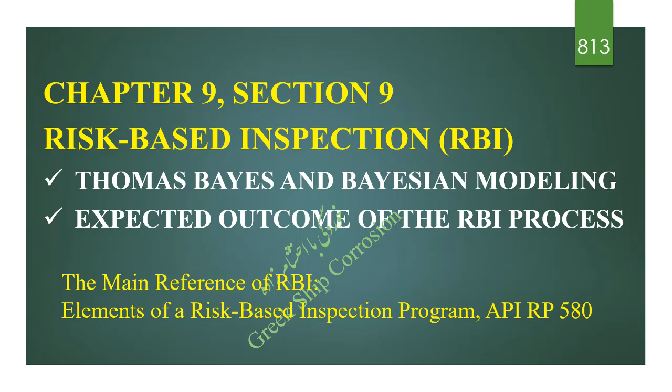Chapter 9, Section 9: Risk-based inspection. In this video: Bayes and Bayesian modeling, and the expected outcome of the RBI process. The main reference of RBI is Elements of a Risk-Based Inspection Program, API RP 580. A brief overview of types of RBI assessment.

An RBI program is based on relative risk, and it is imperative that the RBI assessment be performed consistently. RBI assessment methods can be: 1. Qualitative, 2. Quantitative, or 3. Semi-quantitative. RBI for the petrochemical industry produces a relative risk ranking where no absolute risk values are generated as an output of an RBI assessment. In practice, an RBI program typically uses aspects of qualitative, semi-quantitative, and quantitative methods.

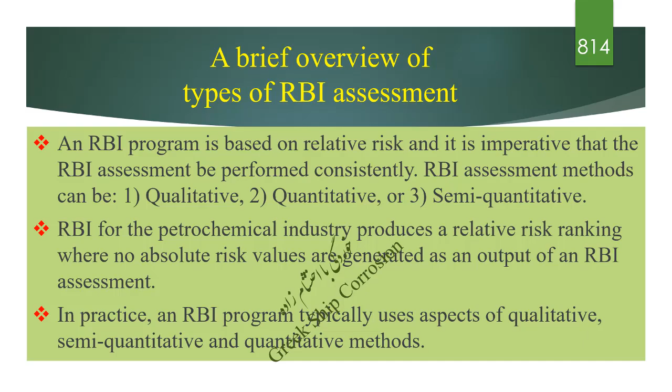Although there are RBI methods that, using mathematical, Bayesian, and/or more comprehensive modeling functionality, could be viewed as quantitative, the concept of a fully quantitative RBI approach has yet to be realized and/or applied in the petrochemical industry.

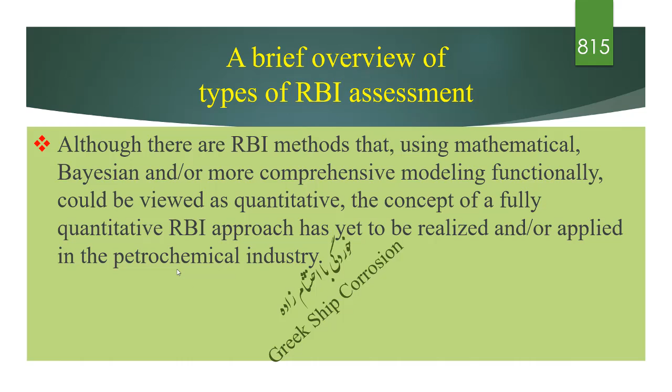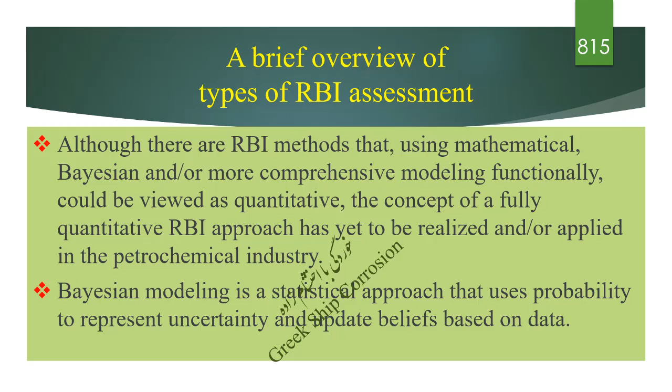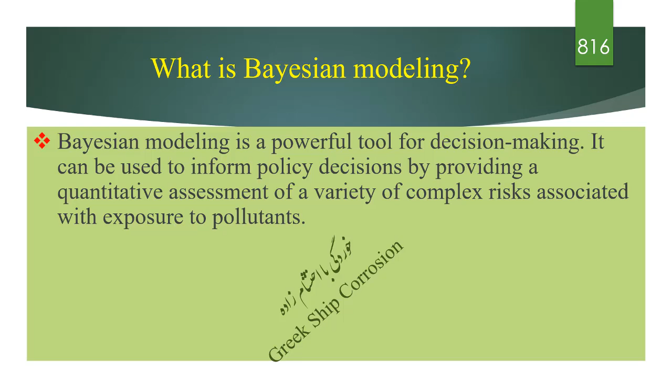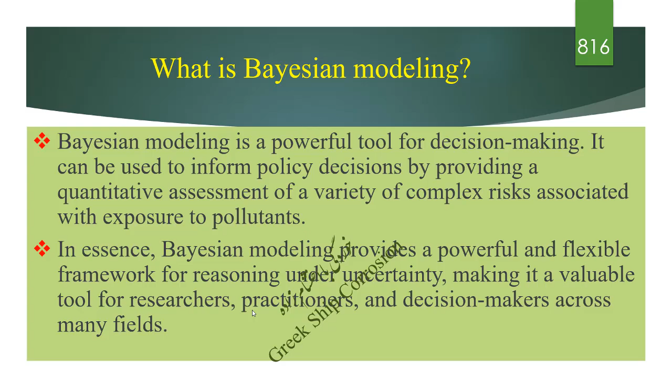Bayesian modeling is a statistical approach that uses probability to represent uncertainty and update beliefs based on data. What is Bayesian modeling? Bayesian modeling is a powerful tool for decision making. It can be used to inform policy decisions by providing a quantitative assessment of a variety of complex risks associated with exposure to pollutants. In essence, Bayesian modeling provides a powerful and flexible framework for reasoning under uncertainty, making it a valuable tool for researchers, practitioners, and decision makers across many fields.

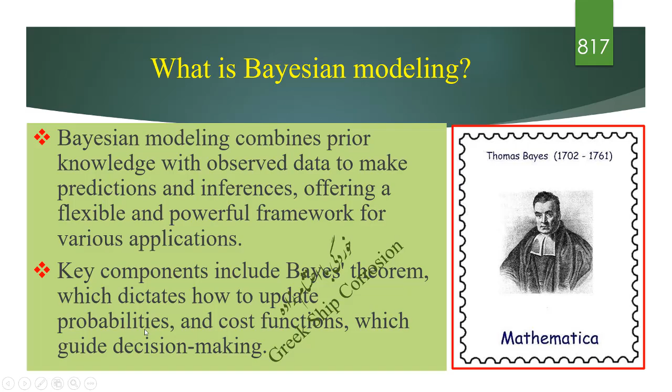Bayesian modeling combines prior knowledge with observed data to make predictions and inferences, offering a flexible and powerful framework for various applications. Key components include Bayes' theorem, which dictates how to update probabilities, and cost functions, which guide decision making.

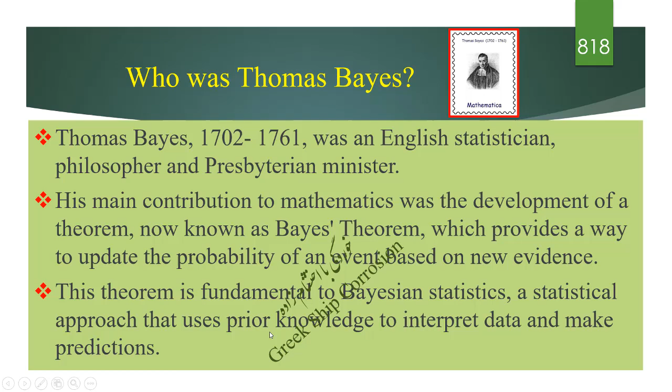Who was Thomas Bayes? Thomas Bayes, 1702 to 1761, was an English statistician, philosopher, and Presbyterian minister. His main contribution to mathematics was the development of a theorem, now known as Bayes' theorem, which provides a way to update the probability of an event based on new evidence. This theorem is fundamental to Bayesian statistics, a statistical approach that uses prior knowledge to interpret data and make predictions.

This image illustrates the core concept of Bayesian inference, a method for updating beliefs based on new evidence. Prior beliefs, shown as the teal curve. Posterior beliefs, the dark green curve. Evidence, the light green curve.

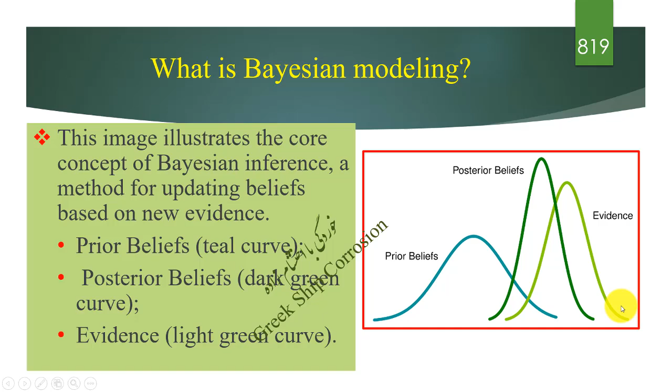Prior beliefs: this represents your initial understanding or probability distribution of a hypothesis before considering any new evidence. Evidence: this represents the likelihood of observing the new data given a particular hypothesis. Posterior beliefs: this is the updated probability distribution of your hypothesis after incorporating the new evidence, a combination of your prior beliefs and the evidence, reflecting a refined understanding.

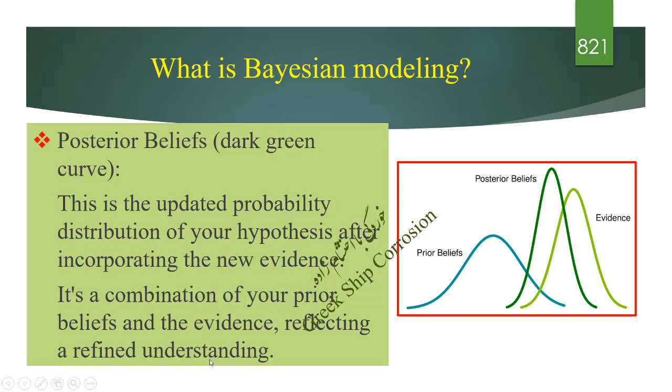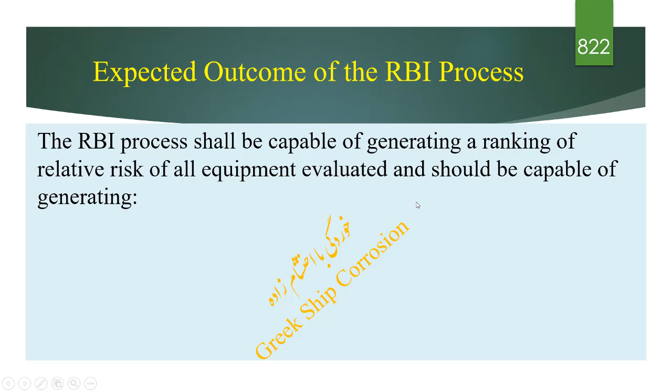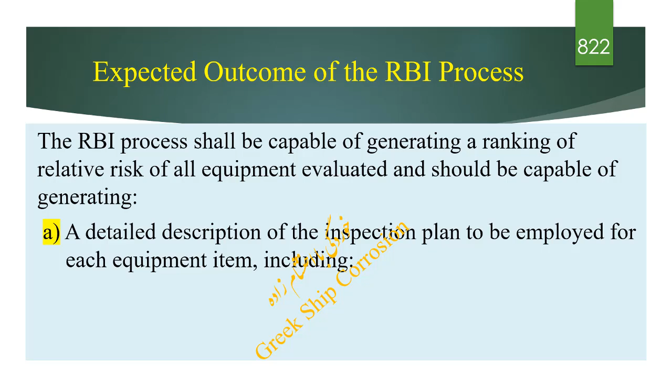Expected outcome of the RBI process: the RBI process shall be capable of generating a ranking of relative risk of all equipment evaluated, and should be capable of generating a detailed description of the inspection plan to be employed for each equipment item, including: 1. Inspection methods that should be used, for example visual, ultrasonic, radiography, wet fluorescent magnetic particle.

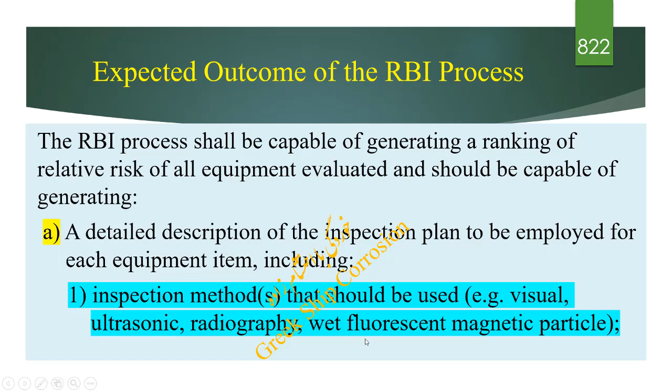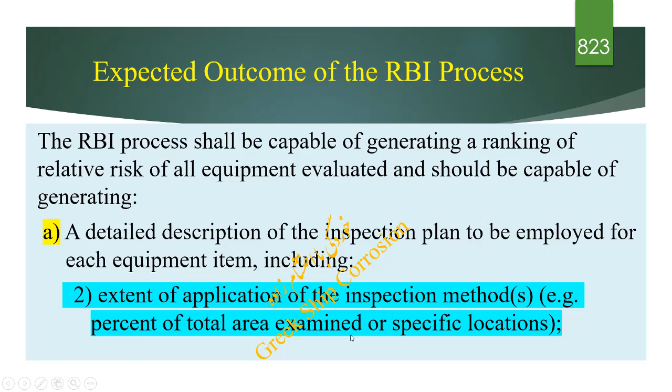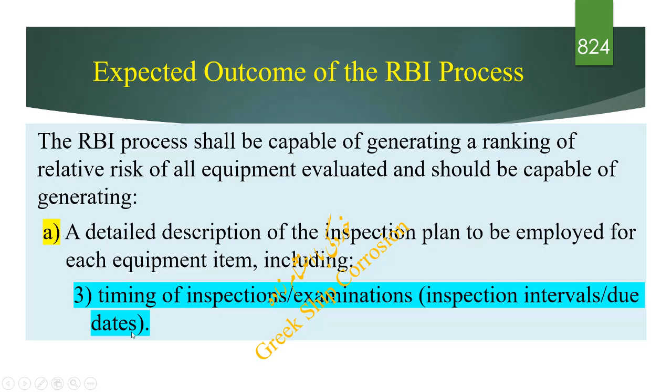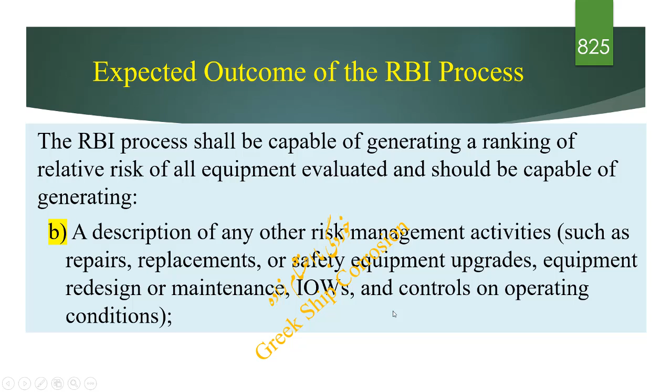2. Extent of application of the inspection methods, for example percent of total area examined or specific locations. 3. Timing of inspections: examinations, inspection intervals, due dates. B. A description of any other risk management activities such as repairs, replacements, or safety equipment upgrades, equipment redesign or maintenance, IOWs, and controls on operating conditions. IOW stands for Integrity Operating Window.

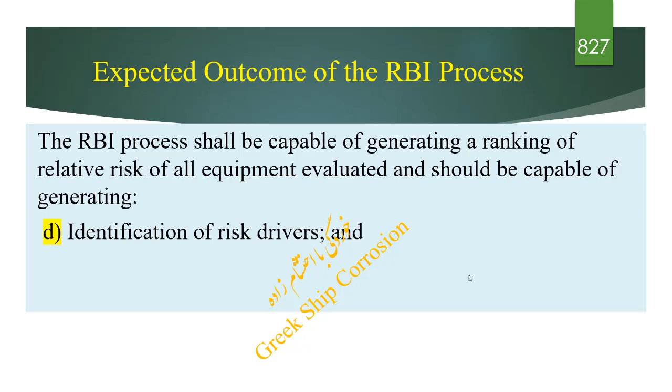C. The expected risk levels of all equipment after the inspection plan and any risk mitigation activities have been implemented. D. Identification of risk drivers. And E. Risk management achieved through implementation of the inspection plan.